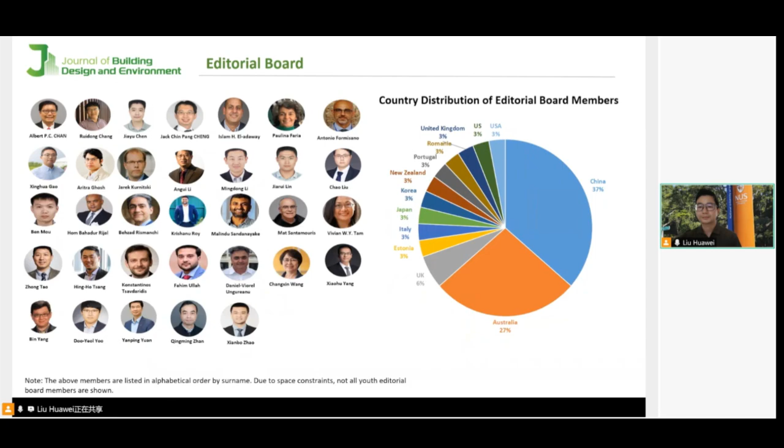JBDE welcomes members to join its editorial board from around the world. Our current editors are outstanding researchers in the fields of building design and building environments, with strong academic fundamentals and international perspective.

In addition to the regular issues, JBDE actively organizes special issues on emerging topics, providing a platform for researchers to explore scientific areas in great depth. These special issues are led by Professor Liu Chao, myself, and other colleagues. We warmly welcome scholars interested in the topic to submit their manuscripts. For more information about our special issues, please visit our website.

Let's briefly introduce the speaker of today's presentation. The first presentation will be given by Professor Duan. Professor Duan is currently an associate professor and PhD supervisor at the College of Civil Engineering in Tongji University, and served as the deputy director of the research section on recycled concrete structures and construction. He has been selected for the Shanghai Pujiang Talent Program and the world's top 2% scientist list.

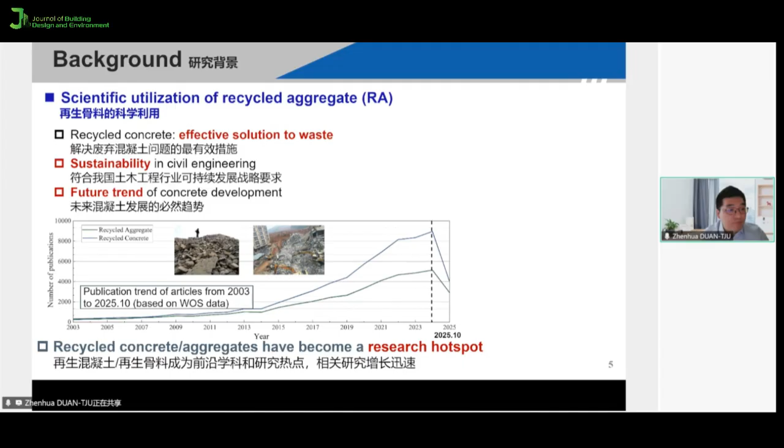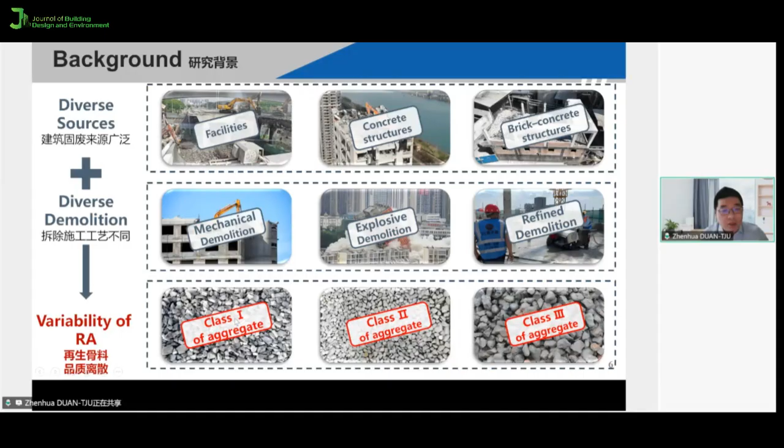However, due to the complex sources of waste and significant differences in demolition and recycling stages, the quality of the processed recycled aggregate is complex and highly variable. We can notice that the source of construction and demolition waste comes from facilities, from concrete structures or brick concrete structures, and the recycling process may come from mechanical demolition and other forms. So the recycled aggregates produced generally have high variability in their properties.

Currently, there have been many breakthroughs in the research of recycled aggregate concrete, and its engineering applications have already been achieved. However, due to the complex quality characteristics of the recycled aggregates mentioned above, their use in concrete may bring about three major problems. First, recycled aggregates generally have high water absorption and faster water absorption rate, making their quality very difficult to quantify. Second, the composition of concrete fluctuates largely due to the introduction of recycled aggregates, and the evolution is difficult to clarify. Finally, and most importantly, the performance of recycled concrete is highly variable and prone to fluctuations, making its properties difficult to predict using traditional methods.

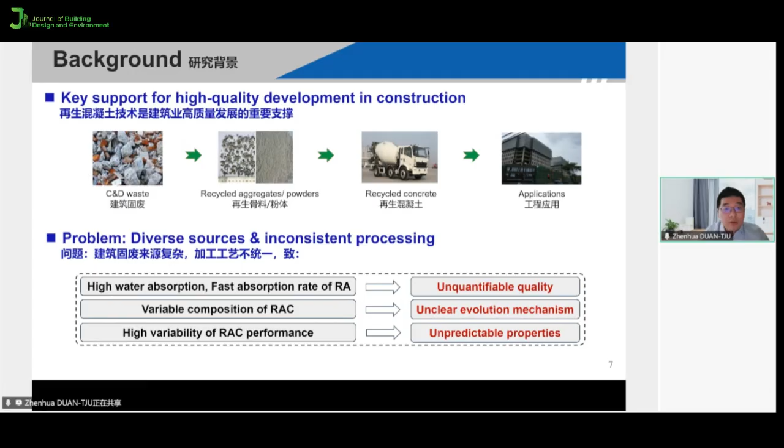So let's introduce some of the work we have carried out in quantifying the quality of recycled aggregate.

Firstly, we use these two images to demonstrate the complex quality characteristics of recycled aggregates. Compared to natural aggregates, the composition of recycled aggregates is more complex, since it may contain impurities such as bricks, tiles, glass, plastics, and so on. It's generally accepted that the biggest difference between recycled aggregates and natural aggregates is the presence of old mortar. However, for each recycled aggregate particle, there may also be many ways of wrapping it with old mortar.

We can understand the above phenomena as a spatial-temporal random distribution problem of old mortar in recycled aggregates.

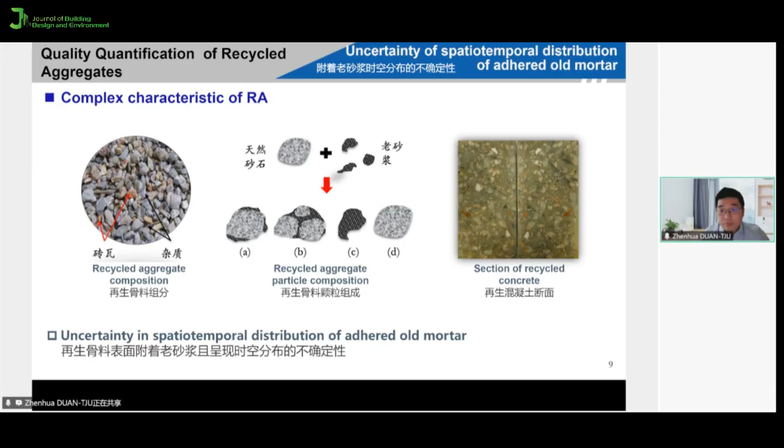In order to explore this problem, modeled recycled coarse aggregate, namely MRCA, is developed by artificially wrapping natural aggregates with varying quantities of mortar with different strengths. In this case, the main characteristics of recycled aggregate, including quantity and quality of attached mortar, could be more precisely investigated with MRCA. This allows for the establishment of a quantitative relationship between the properties of MRCA and those of concrete.

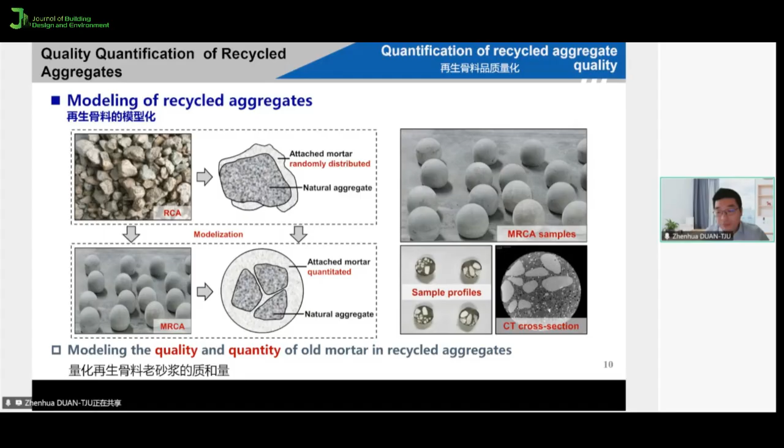We all know that testing the water absorption of coarse aggregates, especially recycled fine aggregates, is very difficult. So to overcome the limitations of the standard method, we have also proposed a time-dependent water absorption test method.

Oven-dried aggregates were placed in a hydrostatic balance system and immersed in distilled water maintained at a constant temperature of 20 degrees. A high-speed camera continuously recorded the mass variation of the system over time, enabling the establishment of time-dependent water absorption curves. This method allows more accurate and continuous measurement of the early-stage absorption behavior of aggregates, while eliminating the need for subjective judgment of their saturation state.

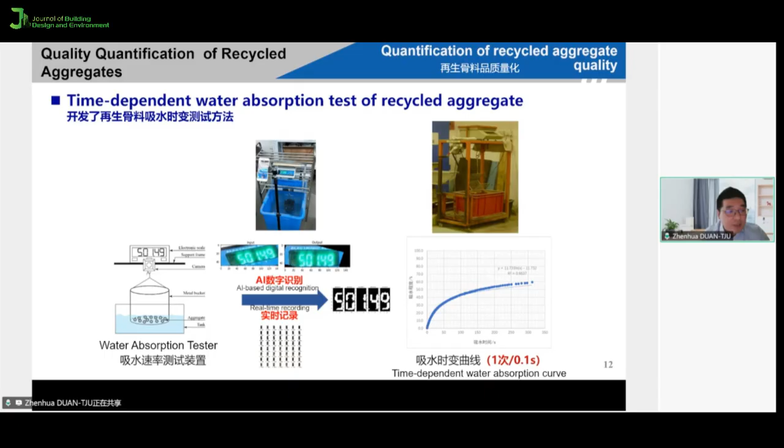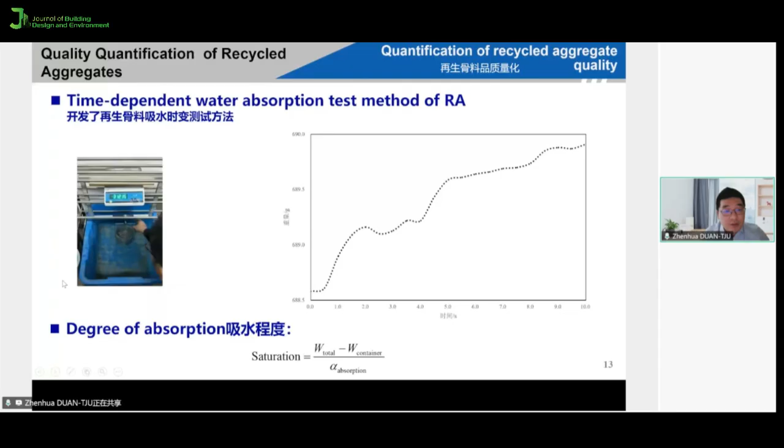We can notice that about 100 test results can be recorded in just 10 seconds, with which the absorption degree of recycled aggregates can be calculated based on the equation. In the case of modeled recycled concrete aggregate, absorption within the first 10 minutes accounted for about 54 to 64% of the total 24-hour absorption.

The water absorption was also measured using the tea bag method, which shows that fine recycled aggregates reached saturation within just a few minutes. This finding highlights the distinct differences in water absorption behavior between coarse and fine recycled aggregates.

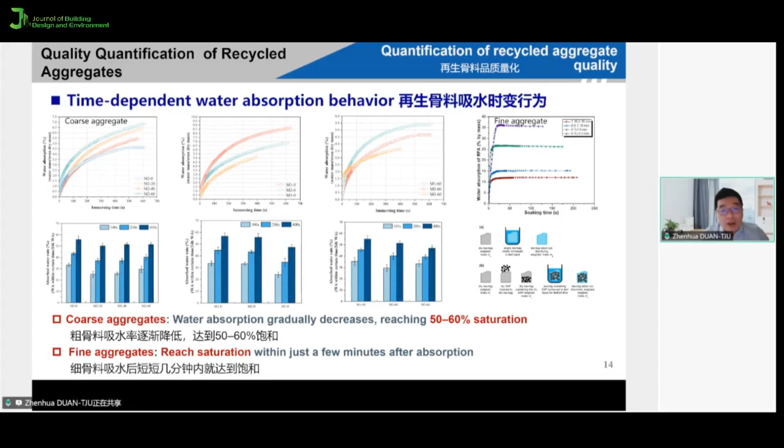Then we need to understand the effect of the complex characteristics of recycled aggregates on the properties of RAC. In laboratory, when we conduct the test, we generally pre-treat recycled aggregate to a dry or saturated surface dry state, but this may lead to the neglect of the influence of the moisture content of recycled aggregates, as the water absorption rate of recycled aggregates varies greatly depending on the moisture content. For example, these are all in the air dry state, but for this one and this one, their water absorption capacity is very different.

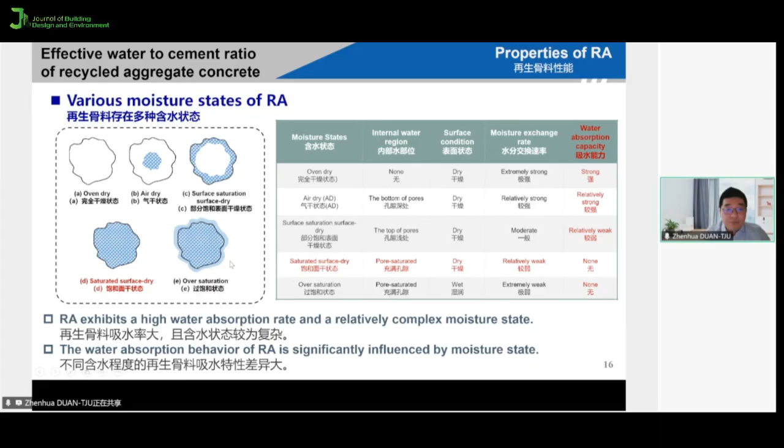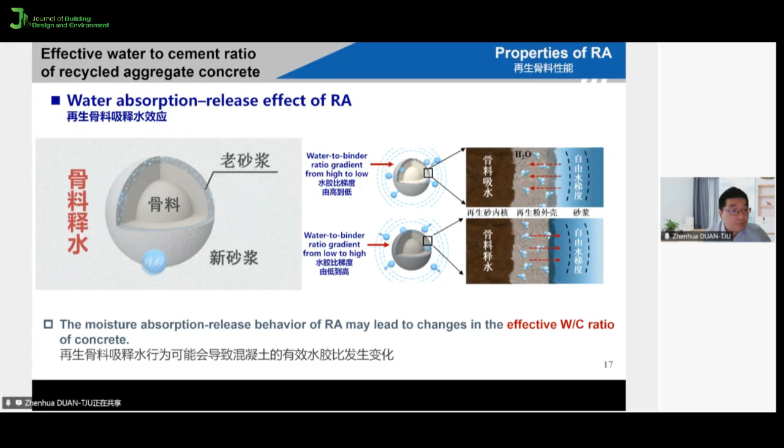This water absorption and release behavior directly affects the internal microenvironment of the concrete. As shown in the figure, moisture migrates between the aggregate and the mortar, forming a gradient in the water-to-cement ratio. And this in turn changes the actual effective water-to-cement ratio of the concrete. Therefore, there is a practical need to conduct a quantitative study on the effects of initial moisture content, as well as the corresponding additional water ratio on the effective water-to-cement ratio.

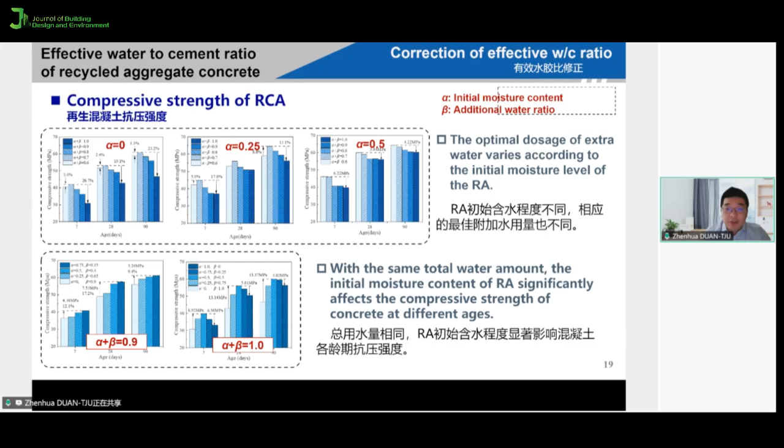Here, we introduced two key parameters. One is the initial moisture content, alpha, and the additional water ratio, beta. Studies have shown that initial moisture content of recycled aggregates significantly affects the compressive strength of concrete at different ages, and the optimal amount of additional water is not fixed. It needs to be carefully adjusted according to the aggregate's initial moisture content. And the effect is also reflected in the hydration process.

And here, when we do the hydration test, we use the mortar with the fine recycled aggregates instead of the traditional method using the paste, because we want to examine the effect of the water absorption rate of the fine aggregate on the hydration. So based on the hydration heat test, we can obtain the accumulated heat release and the heat release rate curve of the mortar, which allow us to analyze its hydration characteristics.

Completely dry recycled aggregate reduces the total 7-day heat release of recycled mortar by about 11.8%, whereas the saturated recycled aggregate increases the 7-day total heat release by about 14.3%. Therefore, recycled fine aggregate with low moisture can restrict the hydration, whereas higher moisture recycled fine aggregate may promote the hydration reaction of the mortar.

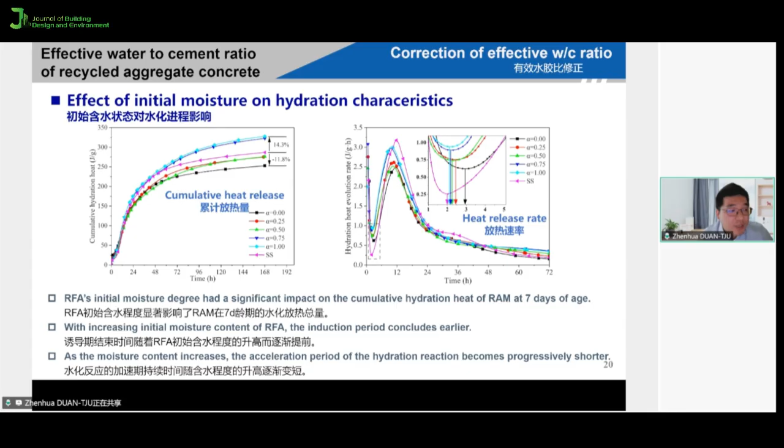And through the hydration heat test on standard mortar, we established a quantitative relationship between the total heat released and the effective water-to-cement ratio. And through this method, we can determine the effective water-to-cement ratio. And we analyze the water-to-cement ratio under 4 different mortar conditions. In the extreme case, where the recycled aggregate releases all its internal water into the paste, the water-to-cement ratio corresponds to the upper limit of the effective water-to-cement ratio. Conversely, when the recycled aggregate absorbs water from the paste to full saturation, the water-to-cement ratio corresponds to the lower limit of the effective water-to-cement ratio.

If there is no water exchange between the aggregate and the paste, the water-to-cement ratio equals the nominal value calculated from the mix design. Finally, the effective water-to-cement ratio can also be determined through some other analysis, and the result shows that without additional water, the effective water-to-cement ratio increases as the aggregate moisture content increases. When the aggregate moisture content is below 0.65, the aggregate primarily absorbs water, with moisture moving from the paste to the aggregate, resulting in an effective water-to-cement ratio lower than the nominal value. When the moisture content exceeds 0.65, the aggregate primarily releases water, with moisture moving from the aggregate to the paste.

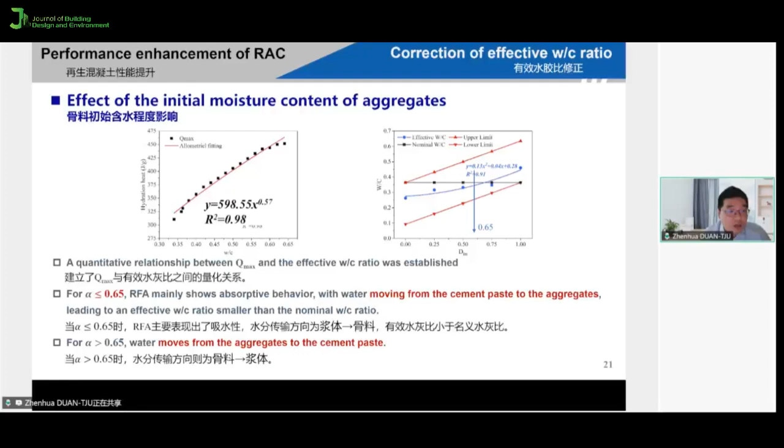And after determining the initial moisture content of the recycled aggregates, we also further studied how the amount of additional water affects the performance of the recycled concrete. The results show that when the initial moisture content is less than 0.5, the sum of the initial moisture and additional water should be around 0.7 to effectively promote hydration. And when the initial moisture content is 0.5 or higher, the sum needs to be increased to 0.8.

And during the acceleration and deceleration stage, we observed a very clear pattern. When the initial moisture content is fixed, the onset time and duration of the induction period of hydration are roughly the same. And the amount of additional water also significantly affects the heat release during both the acceleration and deceleration stages.

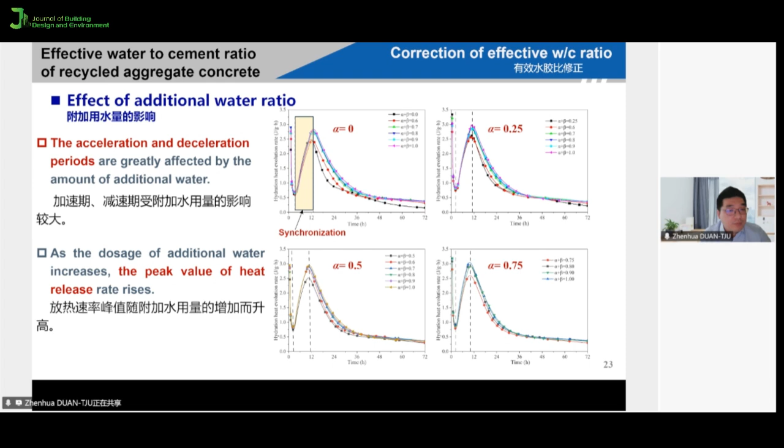And the effective water-to-cement ratio also increases as the amount of additional water increases. Moreover, the higher the aggregate's initial moisture content, the smaller the increase in the effective water-to-cement ratio, and the slower the rate of the changes as additional water is added.

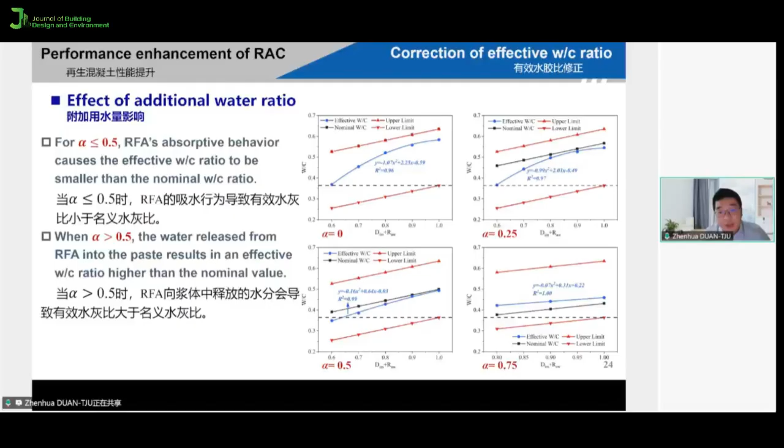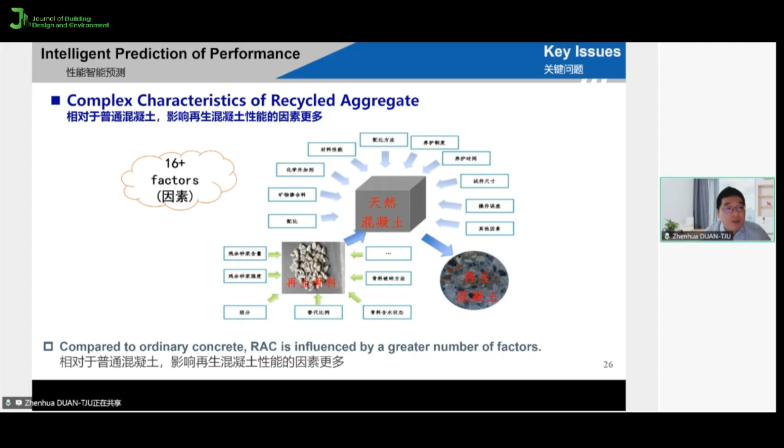Then let's move to the fourth part, the intelligent prediction of recycled aggregate concrete. From the figure, we can notice that there are many factors that affect the performance of concrete, for example, the mix proportions and the properties of each material, and also the process parameters and some other parameters. The introduction of recycled aggregates makes the performance of concrete more difficult to predict. And some traditional methods cannot accurately predict the performance of concrete produced with recycled aggregates.

So we have proposed artificial neural networks, and we think that they might be able to solve this issue, since they can have both the cognitive judgment of humans and the high-speed computing ability of the computer. This is a representative model, and it has the input layer and the function and the output layer.

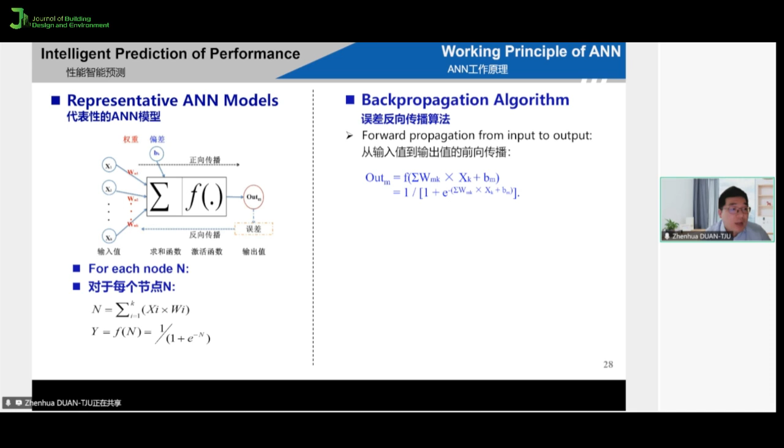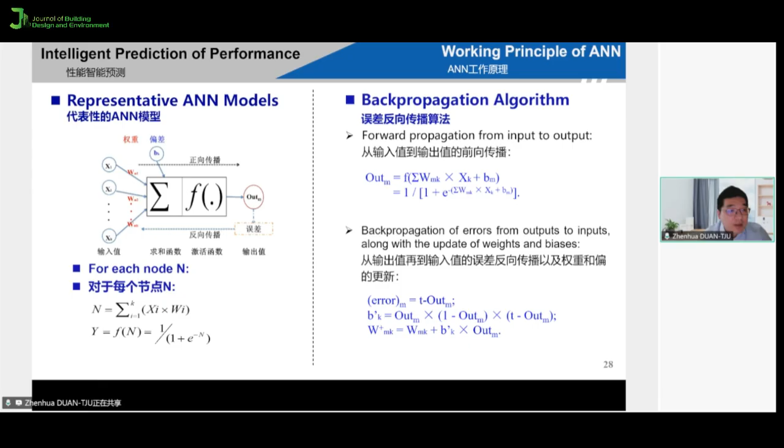And for each node, the ANN calculates output through a process called forward propagation, and then continuously adjusts the internal connection weights through error back propagation. After multiple training iterations, the network's output gradually approaches the target values. This self-learning and optimization process allows the ANN to identify patterns from large amounts of complex data.

For example, this is a simple model to reveal the working principle of neural networks. We have the two input values, and these are the initial weights. We want to predict the target of 0.5. So this is the first forward propagation. After the propagation, we can predict this result. We can notice that there is a large difference between this one and the target value.

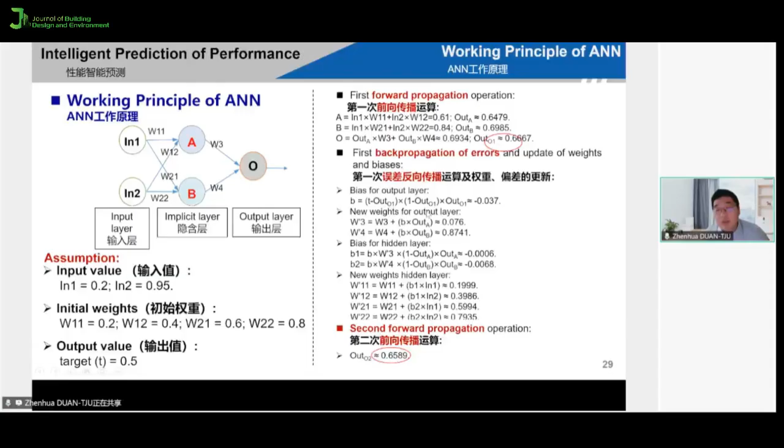But after the first back propagation of errors and the second forward propagation, we can notice that this one is closer to the target value relative to this one. So after about 50 operations, it can get close to the target. So this is the working principle.

Then we made a research program in which we collected data from the published international literature to construct the model, and to train and verify it. After that, we also used our own data to model different design strengths, different aggregate sources, and different crushing techniques to verify the predictive ability of the constructed model.

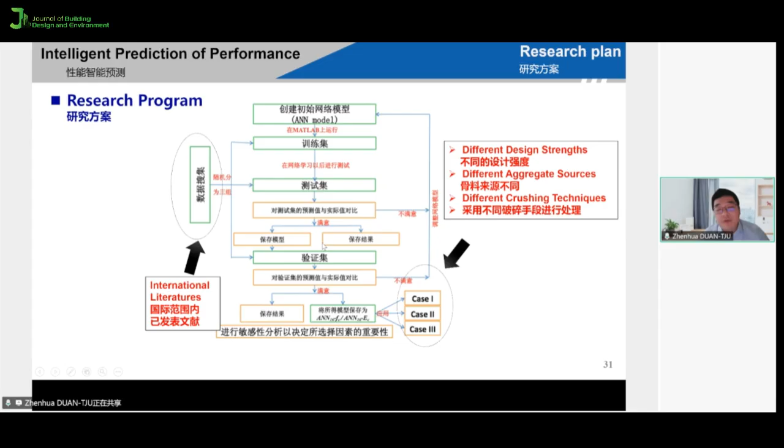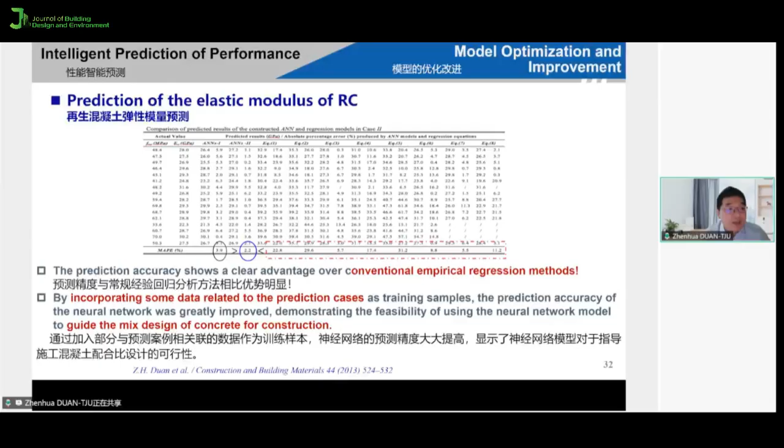The prediction accuracy of the model is significantly better than that of conventional regression formulas. More importantly, by incorporating data related to the specific cases during training, the model's predictive ability is greatly enhanced, and this demonstrates that using ANN to get practical mix design for recycled concrete is indeed feasible. And most of the results also fall within the deviation range of the experimental measurement.

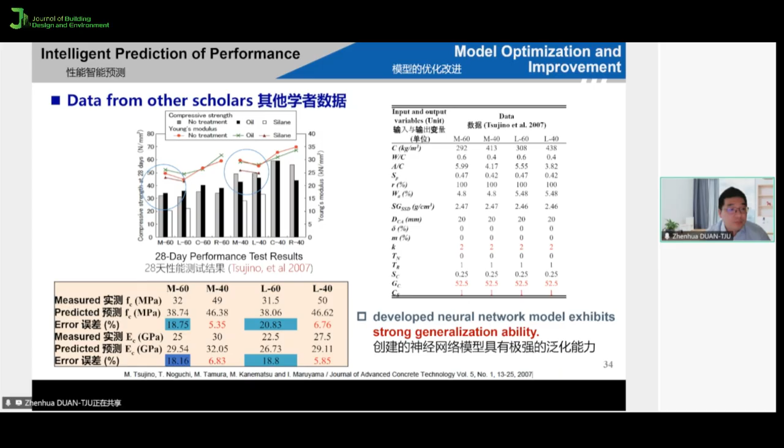And we also validated the model's generalization ability using data from other researchers, and the errors here in red show that they are all within the acceptable limits. And after that, a comprehensive dataset comprising about 659 concrete designs with a wide range of parameters was collected, providing high quality data for model training.

Prior to modeling, an in-depth correlation analysis of the decision variables was conducted to ensure the validity of input features. Based on this foundation, two advanced optimized machine learning models were developed and applied: a genetic algorithm enhanced backpropagation neural network, and a particle swarm optimization based support vector machine. Both approaches integrate intelligent optimization algorithms to improve the performance of conventional models.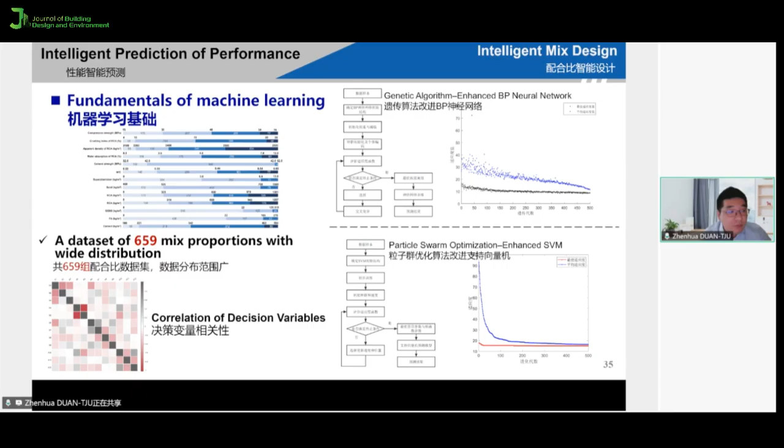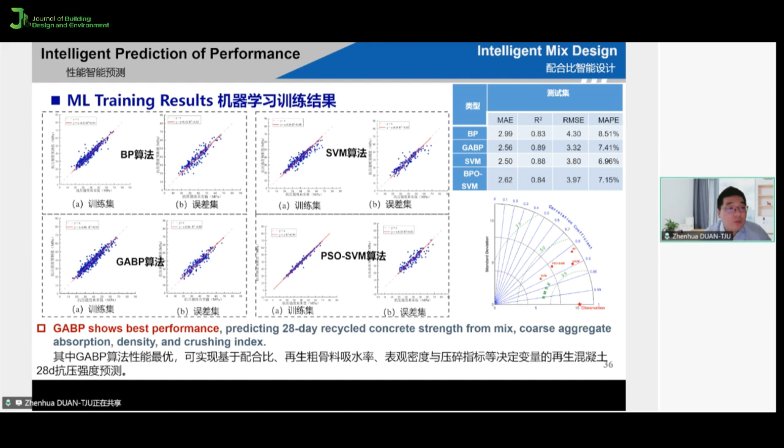And we also compared the four machine learning models, namely BP, GA-BP, SVM, and PSO-SVM, and GA-BP shows the most favorable predictive outcomes. An improved Grey Wolf Optimizer, IGWO, is primarily developed to address global optimization and engineering design problems by incorporating the hunting search strategy based on dimension learning. This algorithm successfully enhanced the overall balance between the local and global search processes, while ensuring population diversity is maintained.

And the single objective optimization reveals that the optimal RAC mixes for compressive strengths of 30, 40, and 50 megapascals achieve reductions in carbon emissions and net carbon emissions of between about 61.8 to 68.1 compared to conventional mixes. These results highlight the significant carbon reduction potential that can be released by adjusting the composition of RAC and specific strength design requirements.

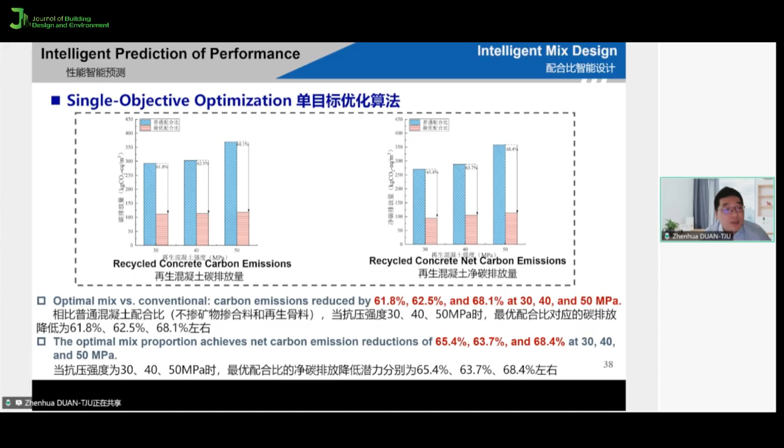And we also did the multi-objective optimization algorithm. The result indicates that compared to the optimal mix proportions without considering carbon sequestration, the replacement ranges for RCA and FA have widened the Pareto front of net carbon emission and cubic compressive strength. RCA with a higher water absorption appears in the Pareto front considering carbon sequestration because the carbon reduction benefit of low quality RCA offsets its adverse effects on strength.

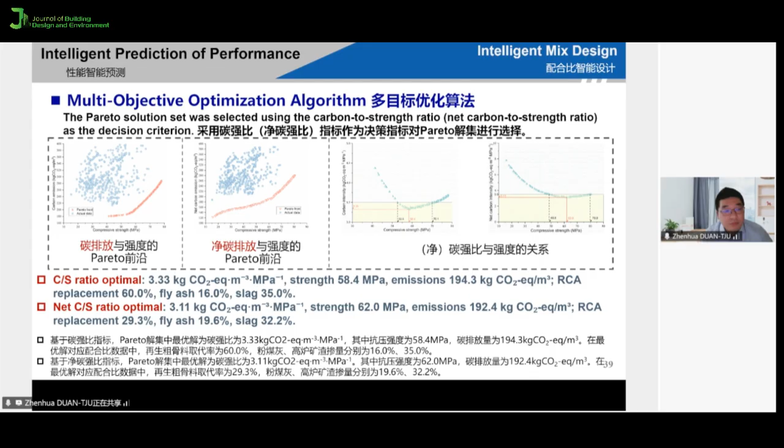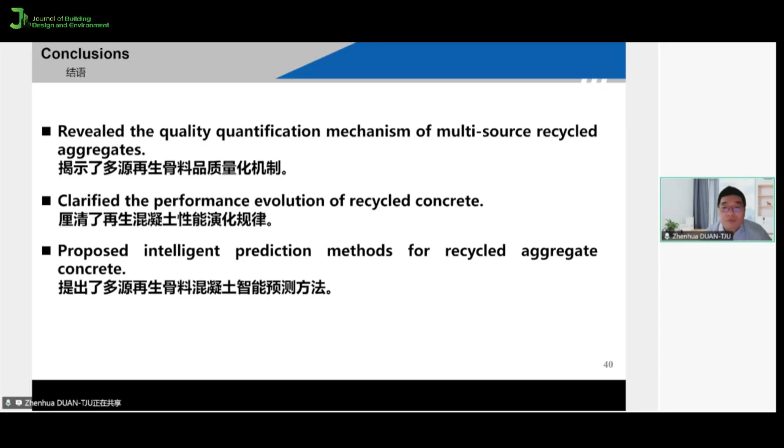So, to summarize, in this work we have revealed the quality quantification mechanism of multi-source recycled aggregates, and we also clarified the performance evolution of the recycled concrete. And we have also proposed an intelligent prediction method for recycled aggregate concrete. That's all.

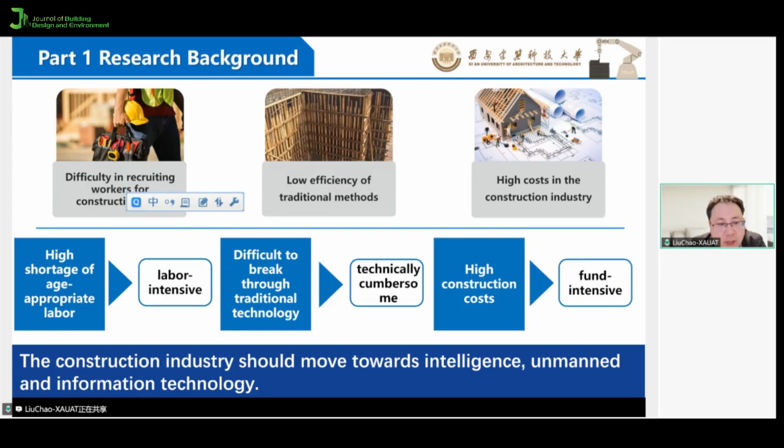The first is the research background. Compared to cast concrete construction, there are the labor shortage and the difficulty to break through the high construction cost. So the construction industry should move towards intelligent, unmanned, and information technology. China needs to seize the 3D printed concrete opportunities to lead the global intelligent construction wave. 3D printed construction technologies are an inevitable trend for the future of the industry.

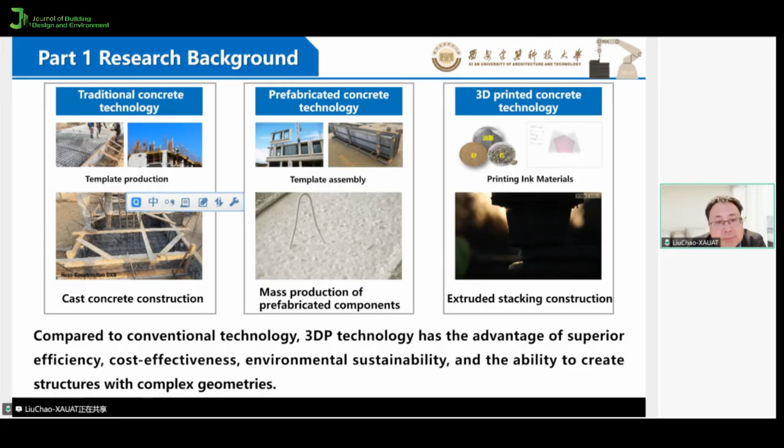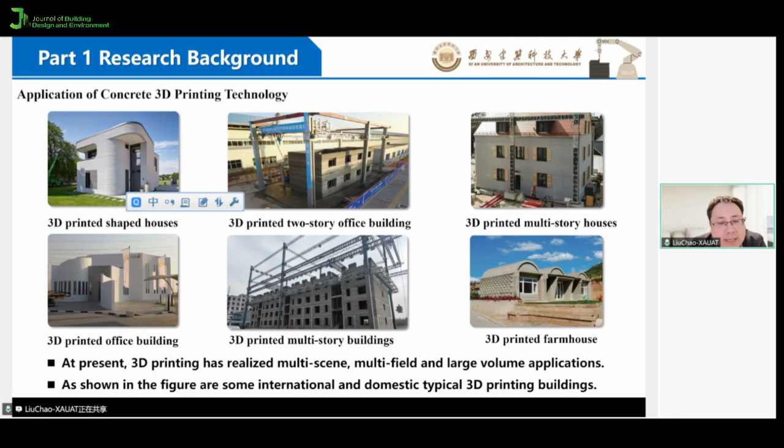These are the three pictures. The left is cast concrete construction, the middle is prefabricated concrete, and 3D printed is the right. Compared to conventional technology, 3D printed concrete technology has the advantages of efficiency, cost effectiveness, environmental sustainability, and create structures with complex shapes. So at present, 3D printing has realized multi-scene, multi-field and large-volume applications.

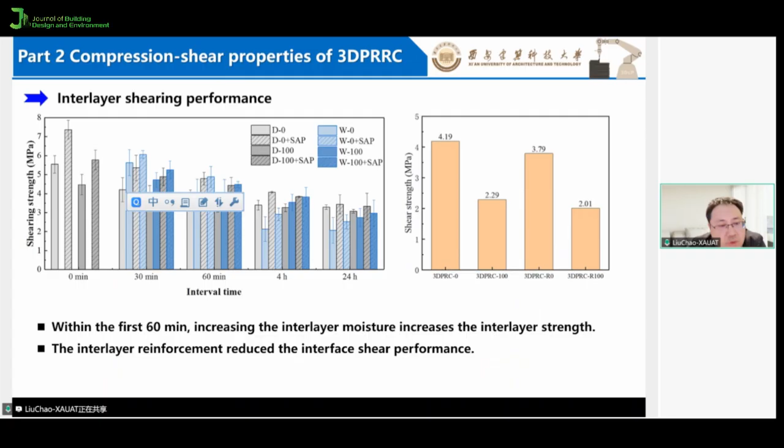Part two is the compression shear and shear properties of 3D printed reinforced recycled concrete, which we call 3DPRRC for short. First, we can see the 3DPRC interlayer interface test method. The interlayer shear performance is different. Within the first 60 minutes, increasing the interlayer moisture increases the interlayer strength. So we did some characterization of the pore structure. The pore structure at the interlayer interface is different.

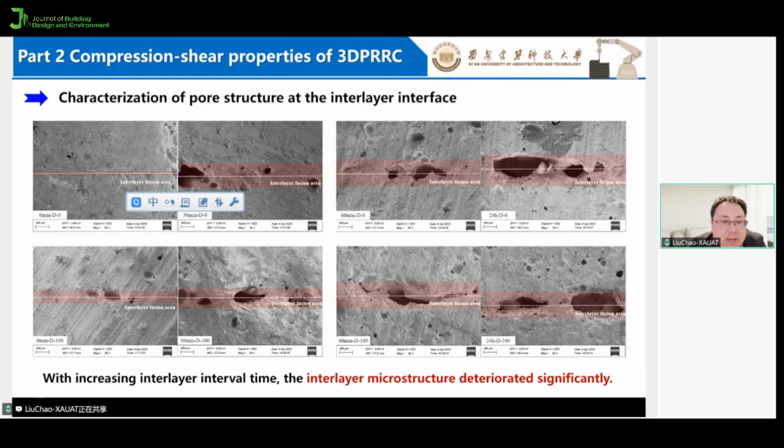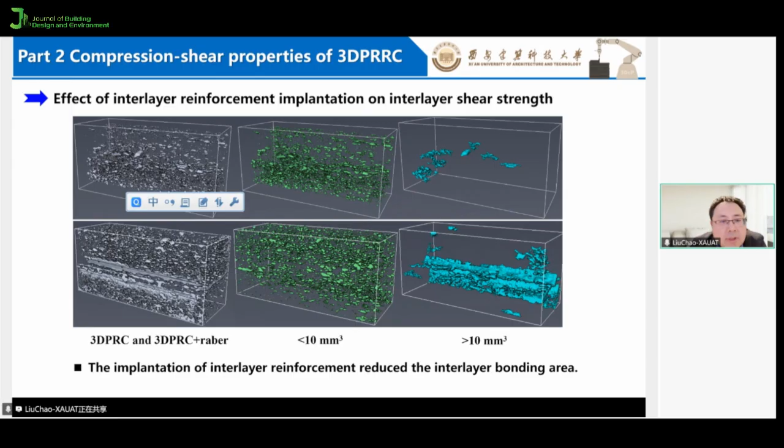We found with increasing interval time, the interlayer microstructure deteriorated significantly. So next, we took another test with the 3D distribution of the pores. We can see some different pictures. The volume of pores larger than 10 mm³ in the interlayer increased significantly with increasing print interval. So we can see the different pores and the different strength.

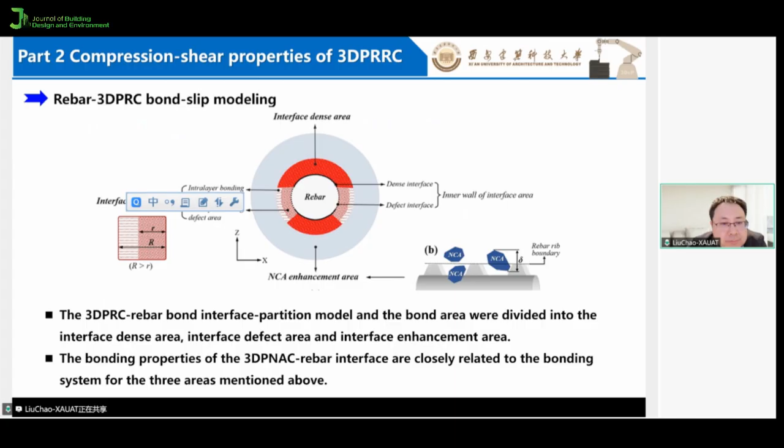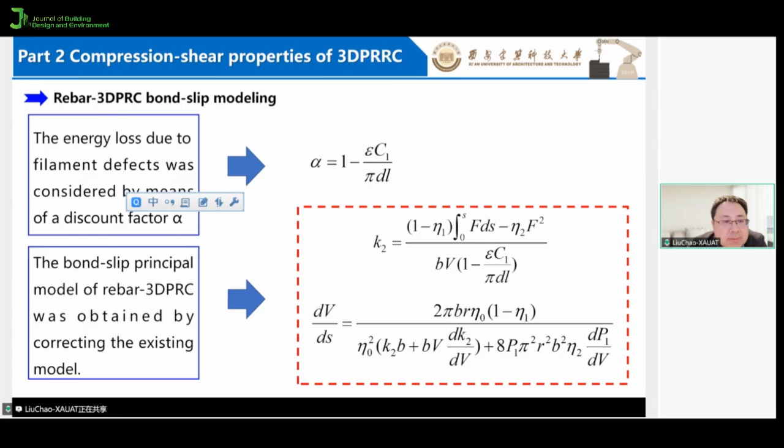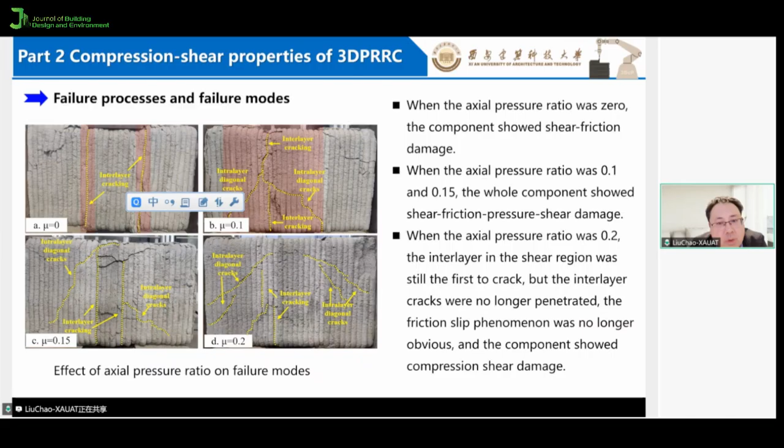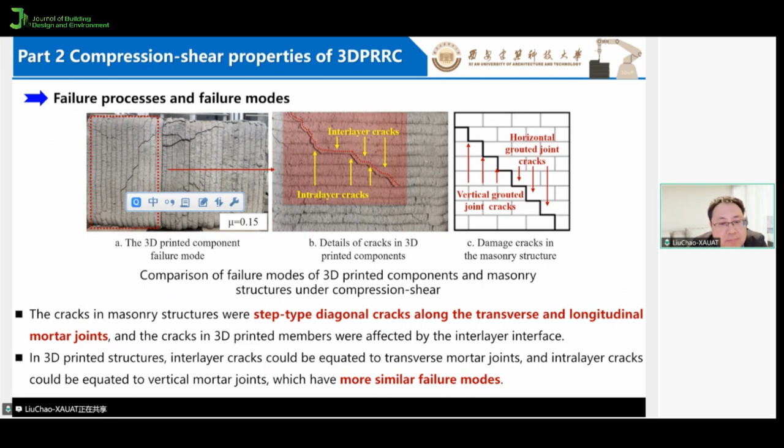First, when the test is over, we found the failure processes and failure modes are different for the different parts. When the ratio is zero, the component showed shear-friction damage. Next, the failure processes and failure modes: the cracks in the masonry structure were a step-type diagonal crack along the transverse and longitudinal mortar joints, and the 3D printed members were affected by the different interfaces.

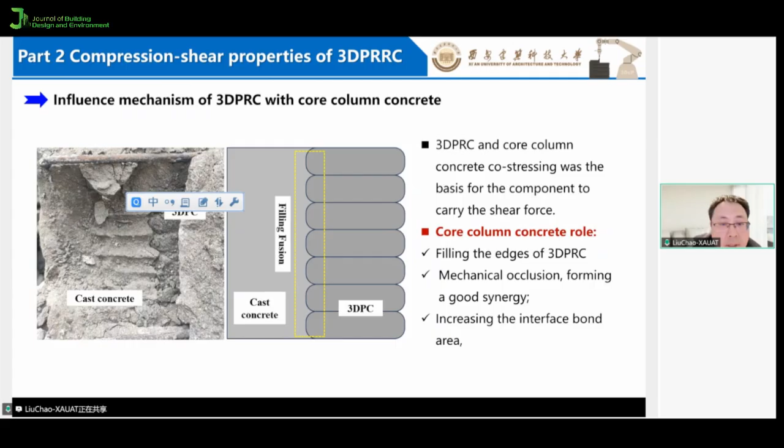So if we use the core column, we should find the different failure modes influencing the mechanism of the 3D PRC with core column concrete. Next, we found the different influence mechanism of the ratio. Under pure shear, the members had poor shear capacity, and when the ratio was present, their load carrying capacity had a significant increase.

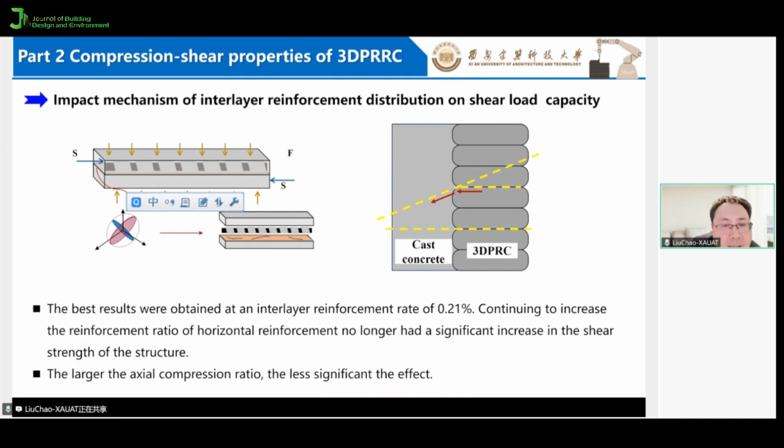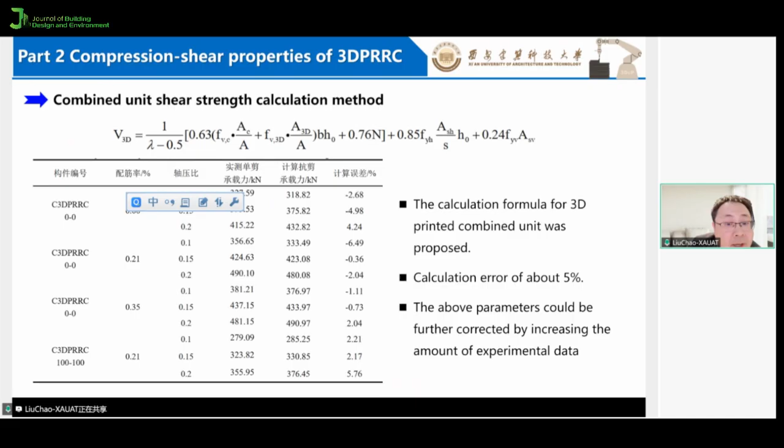Next, we should solve the problem of the impact mechanism of the interlayer reinforcement distribution on shear load capacity. We can find a method, but I think it is not the best. I think it is similar to the test number. So the combined unit shear strength calculation method, I think it is a better method, but it's not the best.

So next, we share part 3. When we finish part 2, we use the 3D printed concrete walls. So how about the 3D printed concrete walls? There are so many buildings, for example, a building in Xi'an, in Yichang, Wuhan, and in Jiangsu province, Lianyungang. In these buildings, with the RC column and the beam, we use some 3D printed walls.

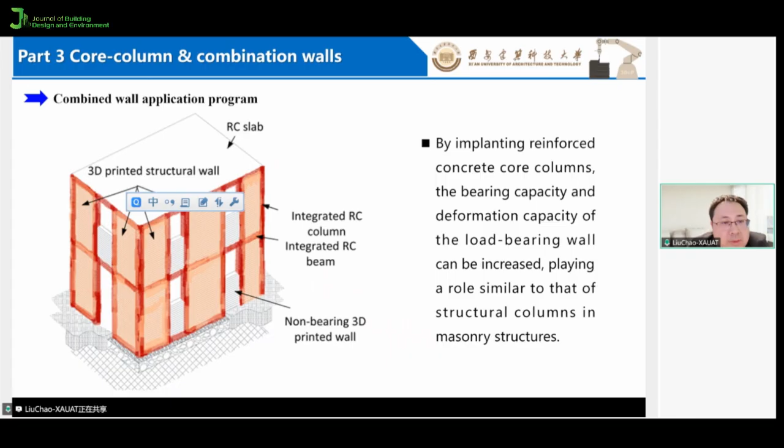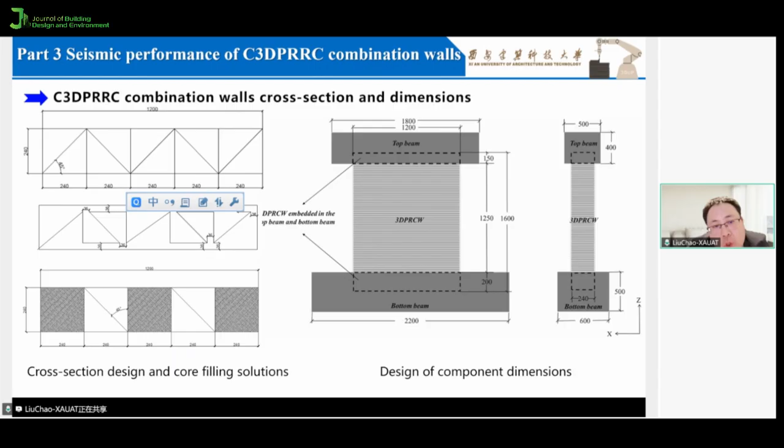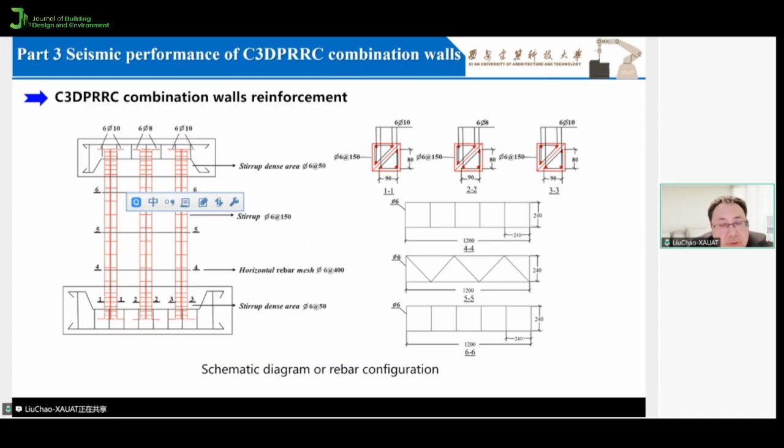So we have tests of the different strengths of the concrete and the rebar. We have the loading device and the loading scheme; a mixture of load and displacement control was used for the test. The load and the displacement, these two parts we use for the test.

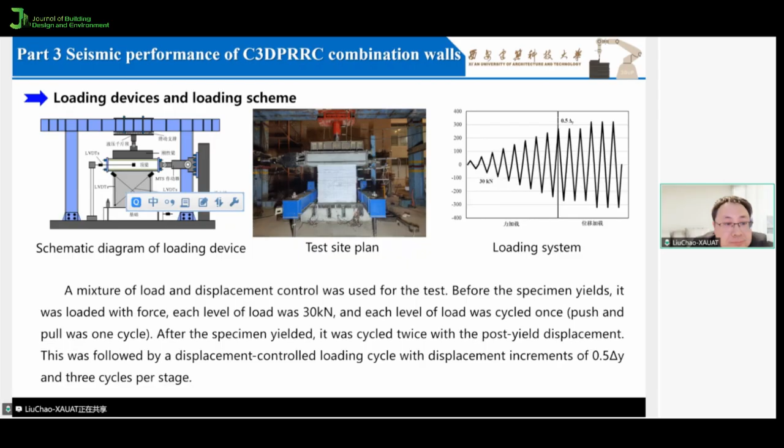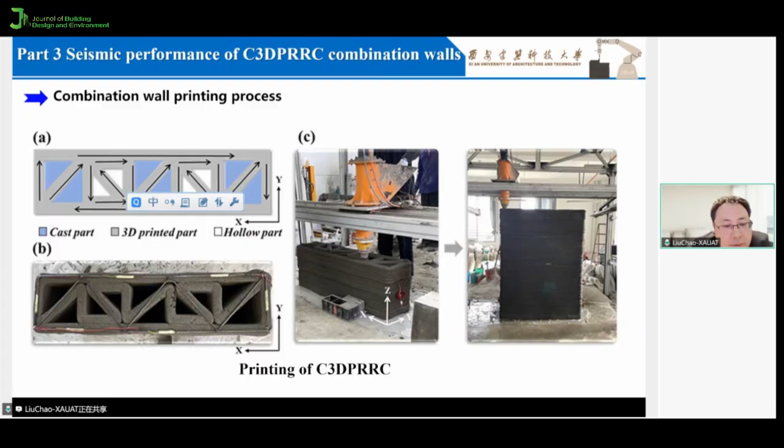The important thing is the combined wall printing process. For example, in picture A, we can see the cast part, the 3D printed part, and the hollow part. The blue is the cast part, whose performance is very good, the black and white is the hollow part, and the other is the 3D printed part. You can see the printing lines. This is the filling process, the reinforcement and the core filling process.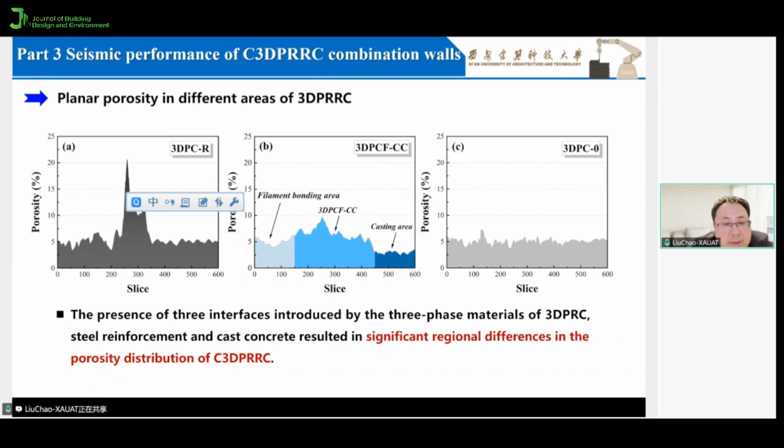The important one is picture B. We can see the different interfaces and the different lines. The porosities, for example, of the 3D PCFCC, the concrete, and the rebar casting area are different. So as above, we take the 3D distributions, and we can find the calculations of the shear strength.

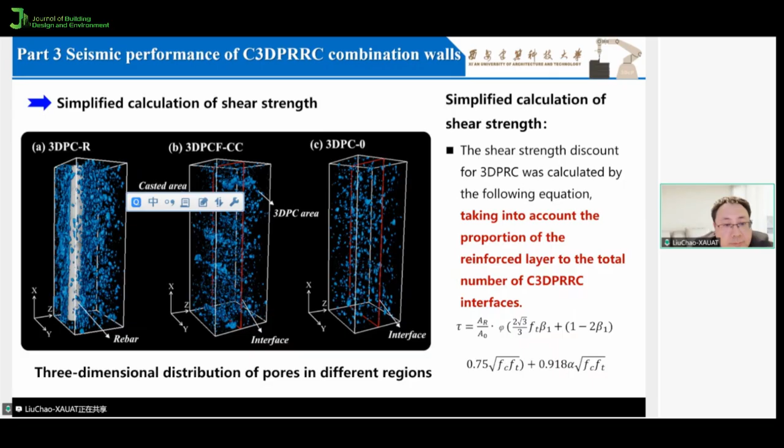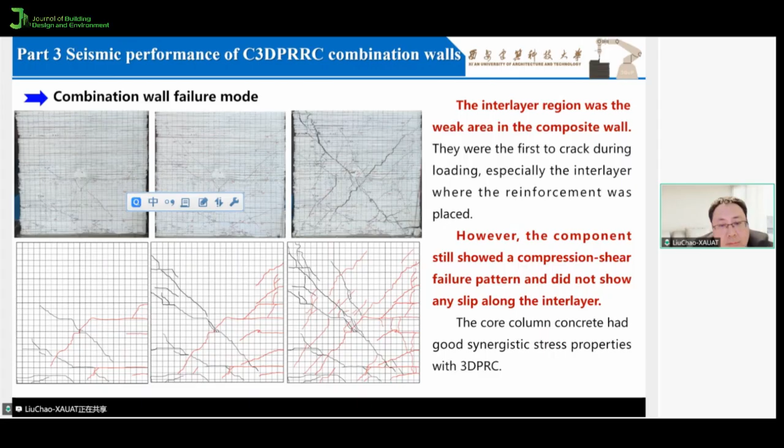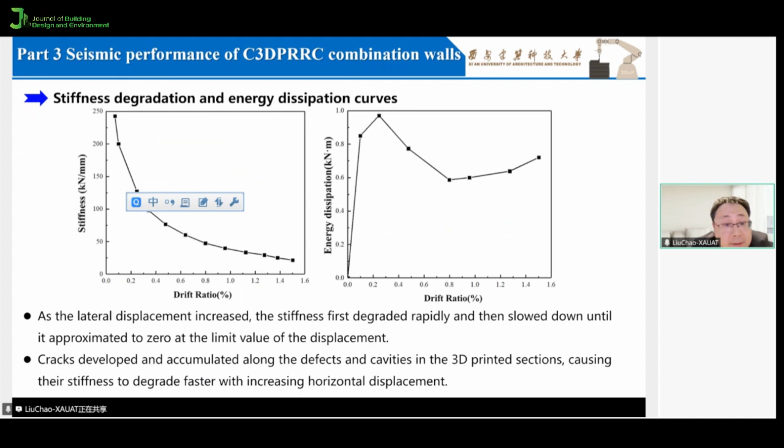We share some research on cluster construction and high value applications of 3D printed concrete. The above is the single part research work. We finished the single-unit construction. So similar to the Olympic Games, we should work hard for more efficiency in challenging the complex and diverse. So if we have so many single parts, for example, a multi-port cluster, how do we build it so the building is more efficient?

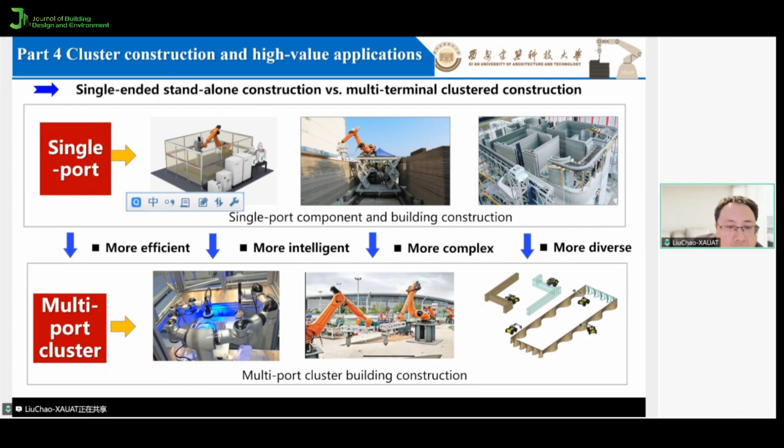There has been a new trend to conduct research on cluster construction by drawing on the behavior of biological groups. So we can see the cluster behavior in nature, and on the right is the robotic cluster construction technology. How to implement cluster construction based on robotic construction is a current international research topic.

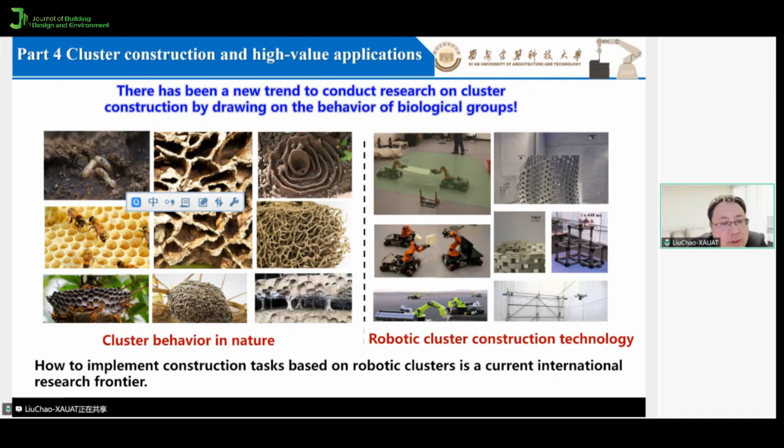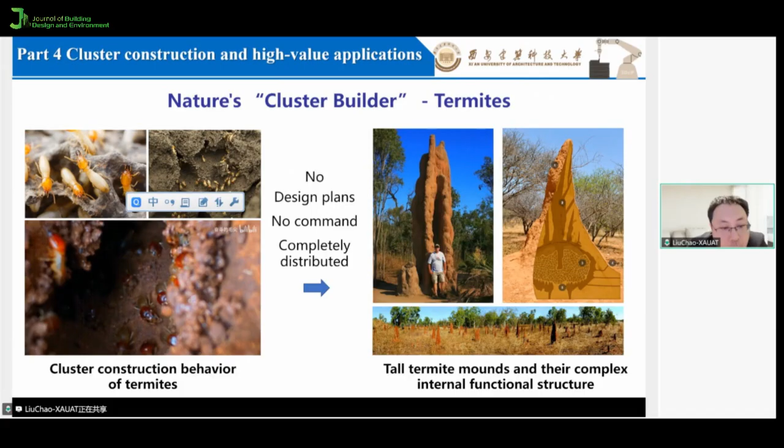So we found an example, nature's cluster builders, the termites. The termites are very, very small, but so many termites build their home, and their home is a very big building. From the right picture, we can see this building is tall, big and strong. So we call termites nature's cluster builders. How do they finish this work? This provides a definite opportunity for intelligent construction of clusters.

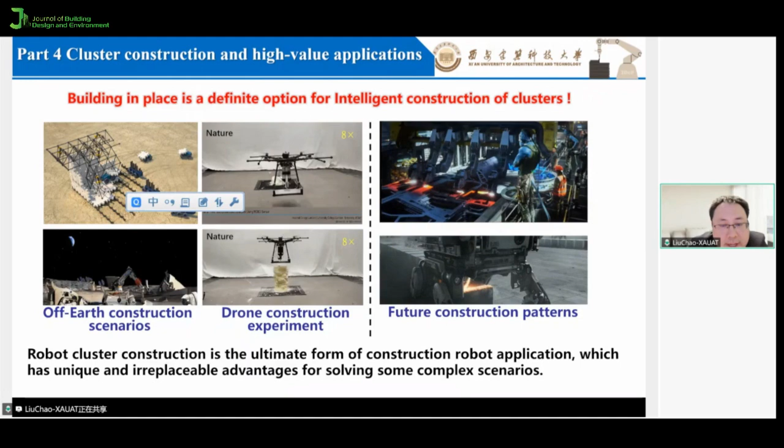So we can do some research work to solve these problems on the machine, and so on. So we have the cooperation, the partnership with the Northwestern University and, the Chinese name is, Zhongshan University. We get the laboratories and the research parts from biological behavior, the clustering system and the key technology, and we can find some cluster builders. So we do some research work and finish it, and we think we can achieve our visions. So this is our normal research work.

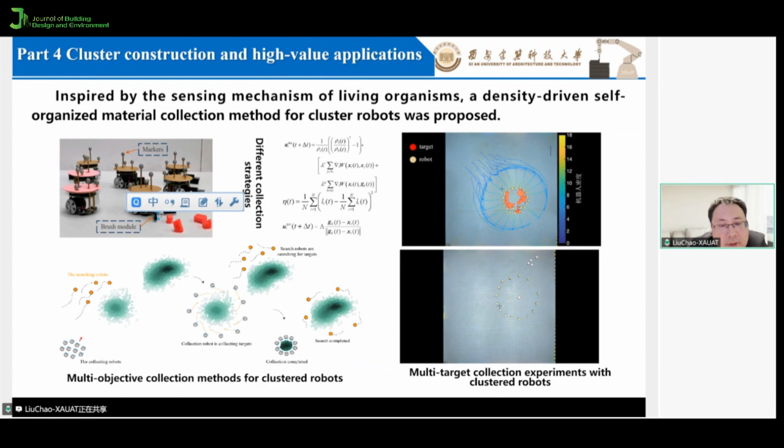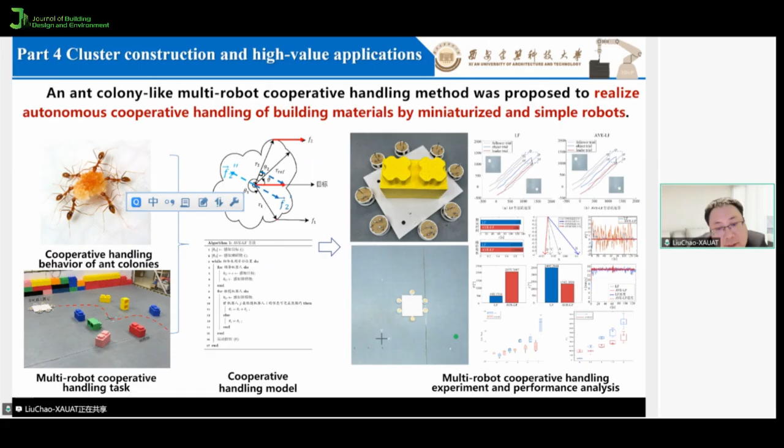You can see on the right the robots, the pink robot and the yellow robot. Inspired by the mechanism of the living organism and density-driven self-organization, a materials collection method for cluster robots was proposed. The right is the multi-target collecting experiment of the different robots, the pink and the yellow robots. So the ant colony-like multi-robot cooperative handling method was proposed to realize autonomous cooperative handling of the building materials by simple robots. We can solve the multi-robot cooperative handling experiment. This is the test and the research work.

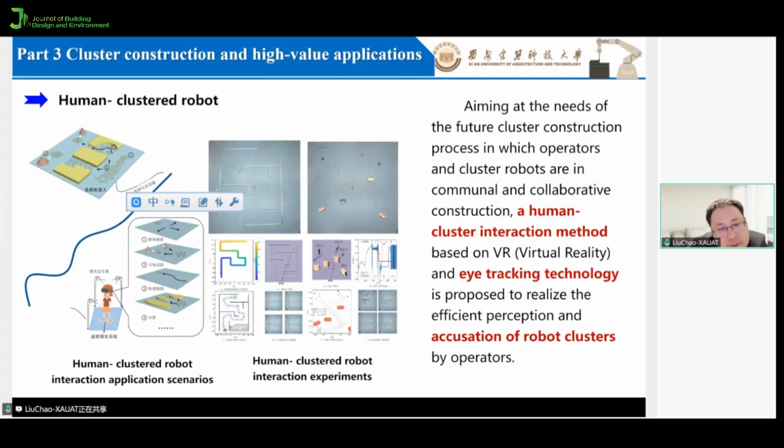So next we should finish some of the human-cluster robot work, aiming at the needs of the future cluster construction process, in which operators and the cluster robots are in common construction. A human-cluster interaction method based on VR. VR is popular in China, in Chinese family life, and we should use the eye tracking technology. It is proposed to realize efficient perception by the operator. So the eye tracking technology can solve some of the problems, the problem of the short opening time. It is the concrete, and inconsistent intensity and the wide distance spacing.

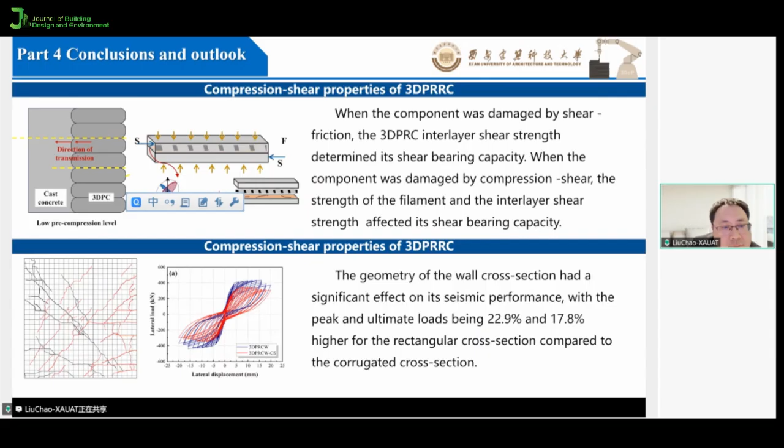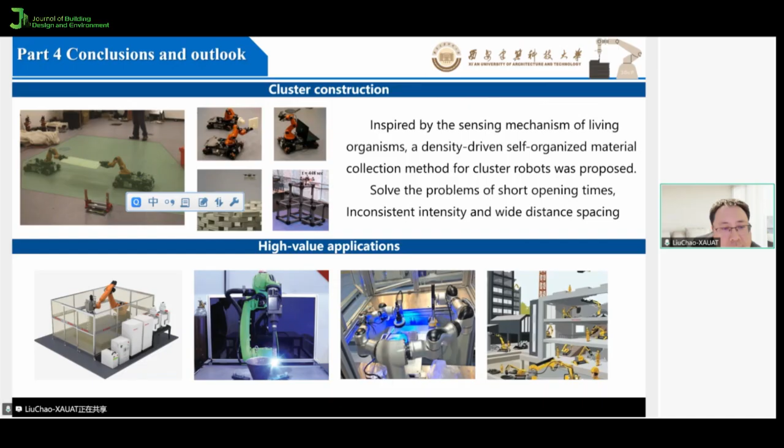Okay, the last one is the conclusion and the outlook. So in this report, we shared some of the research work on the compression shear properties and some cluster construction. I think 3D printing has high-value applications in the future. So thank you, friends, for listening to the report.

Thank you so much, Professor Liu. I truly appreciate the valuable insights and the fresh ideas you brought to us, especially in 3D printed concrete seismic performance.

Can you stop the screen share? I'll share the screen for the next session. Okay. I share the screen.